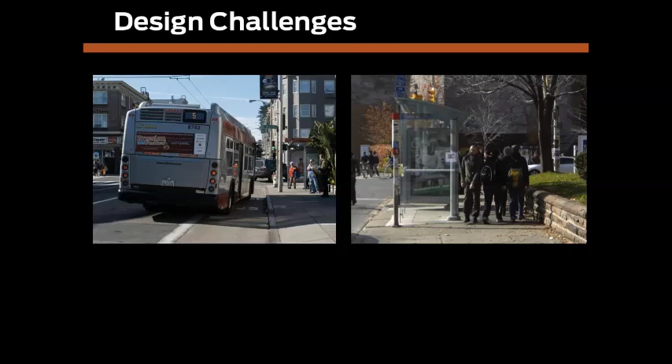Transit faces very specific design challenges, even in cities where there's already great transit service, even on streets where there's already a lot of on-street transit activity, and even when there's a lot of demand. We often face conditions where transit street design is an afterthought, even when there's frequent service already on a street, even when a lot of people are using it. So that's why street design matters.

So we're going to talk about why these principles have been developed and how they come into play in cities. The Transit Street Design Guide draws from best practice and cutting-edge research from across the continent and around the world to promulgate this new set of principles for designing streets that'll support efficient, safe, and comfortable transit service for everybody. It's really not just about making the bus run faster, making on-street rail run faster, but about getting people to transit and using transit as a tool for city building.

Better streets create better service. Investments in transit streets that organize and balance the users of a street can improve the streetscape and place transit in a priority position at any scale, from small neighborhood streets to significant capital reconstruction projects that place mass mobility front and center.

Transit creates urban places. We're in a singular time of urban population growth and regeneration, both in the United States and around the world. Almost half of Americans say they want to live in walkable urban places, and about half of those already know that what walkable urban places mean is a big city neighborhood. But only about 2% of the homes in the United States are in a walkable, transit-connected place. We can do much, much better than that.

In some cities, planners and engineers, service planners, transit providers are completely reconsidering the role of their transit system within the whole transportation suite of the city, considering how transit functions in relation to more on-demand services, in relation to bicycle networks, in relation to walking, and in relation to the growth of the city overall and over time.

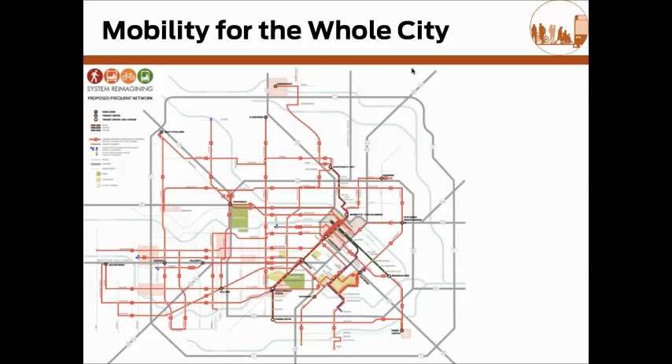This is the Houston new bus network. This is frequent service before the plan was executed in August 2015, and this is after. The remarkable thing is that they did this without spending significantly more money on service, and provided the city with not just service to downtown, not just reliable service that would get people in and out of the core of the city, where there's still a very significant amount of employment, but where a lot of growth has been pretty far outside of it and had been pretty disconnected from transit. So not only getting to downtown, but getting to the entire city and getting to the densest neighborhoods, some of which didn't have any frequent transit routes at all.

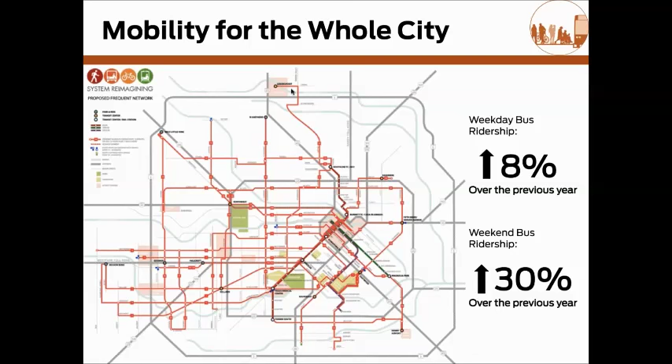The results speak for themselves. Weekday bus ridership is up, and weekend bus ridership is substantially up as people have come to rely on transit not just for a more conventional 9-to-5 work trip, but for a wide variety of the trips they want to take. As cities grow denser, there's just no way to grow while relying on the automobile.

There just isn't the space. We're not going to move everybody in cars who wants to be in a city, and they don't want to be moving in cars. And we certainly can't build the kinds of underground and above-ground capital investments that have traditionally been the trunk lines of transit systems in the United States to meet that massive growth. We certainly can't do it quickly enough.

But we can move people on the street in very large numbers if we take the leap to dedicate space to transit. It's far and away the most space-efficient travel mode, and therefore deserves the most investment on the street where people want to be. Whether users on the street are riding transit or not, everybody benefits from great transit, unlocking the street space and increasing connections to the rest of the city without pushing more and more cars onto the street.

One of the benefits that transit has for a city is to create the possibility of safe movement at a large scale. Transit has a 50-to-1 advantage over cars for vehicle occupant safety, and the safest cities are transit cities. A recent study observed reductions in injuries and fatalities after implementation of BRT projects of 25 to up to 70% on corridors. So transit safety is really all about people walking, and pedestrian safety is closely tied to the access and completeness of the networks.

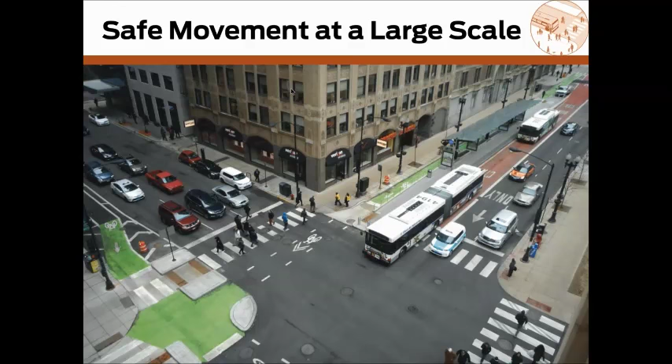What this guide does is add to that mix how you create great streets for transit that are also great streets to walk and bike on, as this example from Chicago shows. Finally, transit projects not only move people into a safer mode, but provide a chance to remake the entire street.

Cities are realizing the importance of planning growth around transit. The positive effects of transit investment on local business activity and regional competitiveness is well documented by now. But what's really important is to realize that it's not just the mode, it's the reliability and the permanence of the mode that matter.

And so cities are expanding far beyond the most tried and true methods that might be more popular with some or other groups of doing rail investment, of doing large-scale redevelopment, but really being able to use all the modes of transit as tactical ways and long-term ways of improving the local economic conditions and providing permanent economic benefits in neighborhoods and in large redevelopments alike. So as transit enables better access to communities, ridership really reinforces its own permanence and sets off that virtuous upward spiral.

Better ridership means more frequent service, and that means we need to put things where transit is so that people can actually use transit to get to those things, creating that simple yet vital upward growth in ridership. At every scale, at the neighborhood scale, the Transit Street Design Guide provides design packages that work on streets where the desire isn't for very fast movement, but for reliable movement.

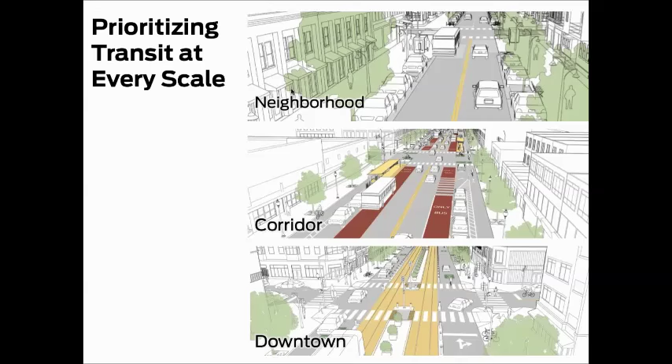For keeping buses in their lane and not forcing them to get stuck behind queued cars, to busy corridors that move very large numbers of people in transit and in every mode, providing an organized street that gives reliability, safety and comfort to every mode. To downtown settings where it's really all about public space and delivering people in large volumes as they get to their destinations. Downtown and destination streets can be linear public spaces, and that's critical to understanding the intention behind the guide.

The NACTO Transit Street Design Guide is the product of work by 45 cities, 18 transit agencies that participated in the steering committee, agencies that operate everything from bus to light rail to streetcar and everything in between. This steering committee, along with the contributing committee from ITE, the Institute of Transportation Engineers, and input from various federal agencies that work on both accessibility and on transit and on streets, ensure that the guide will be useful to both practitioners and the public, from the most technical users, signals engineers, to neighborhood leaders who really just want to make their own streets better.

I'd like to make a special call out to the NACTO staff who worked extremely hard on putting this guide together, certainly not just me, but also Craig Toocheck and Aaron Villere, as well as Corinne Kisner. Craig and Aaron's work on graphics, illustrations and production resulted in a gorgeous guide, and we couldn't have done it without Corinne's insight.

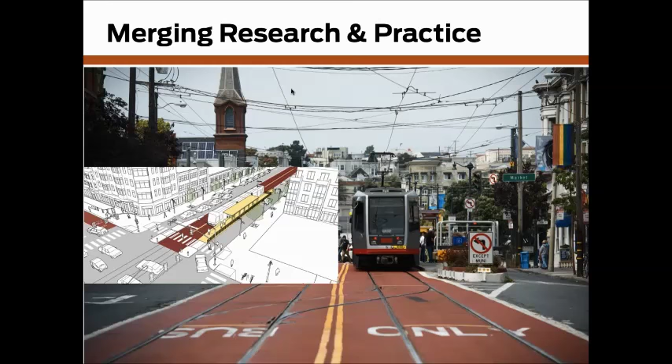One of the advantages of working at the level of city government is that cities are right on the forefront of practice, often far ahead of research. But research has come a very long way in transit, and we've got a great body of work to draw on, so we were able to construct full-scale models of streets. These are our street typologies, which form the core, the heart of the guide, together with more specific guidance recommendations, and built on and enhanced by detailed case studies that explain how these kinds of streets have been implemented in real life.

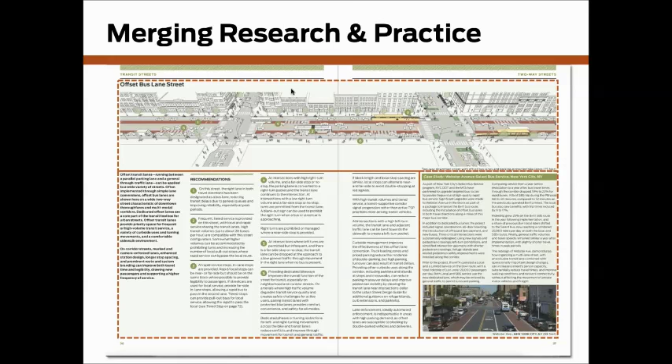So, the chapters of the guide: why transit streets matter, which we've talked about. What transit streets are—the typologies, stations and stops and elements, transit lanes and transitways—and then intersections and signals and systemic strategies.

The stations and stops section really explains how to go from stops to stations. That's a core principle for understanding how to create transit streets. Stations really create a sense of place, a sense of permanence, and they draw people to transit, draw people to a street, making them feel like it's part of their street.

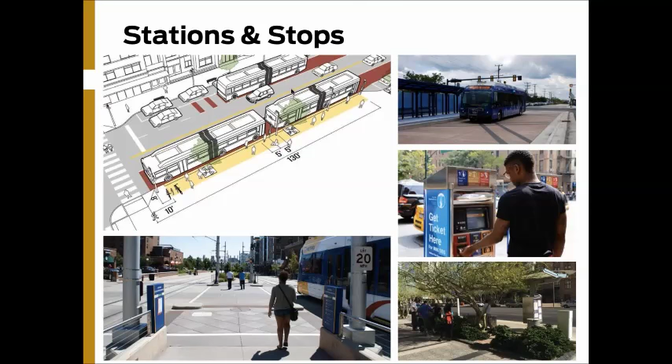And it's not always a matter of building large structures. Sometimes it can be as simple as providing shade trees that actually change the environment for people waiting for the bus. Sometimes it's as simple as explaining to people how to board a bus quickly, and providing ways to do that.

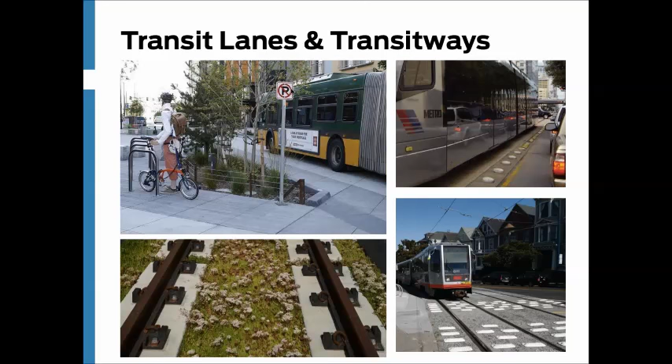There's detailed guidance on how to design transit lanes and transitways. We use transitways to mean any fully exclusive running way, whether for bus or for rail, and even guidance on the kinds of materials that have worked well, whether it's scored concrete or permeable green running ways, or simple means of separation that can keep everybody in the right lane on a street.

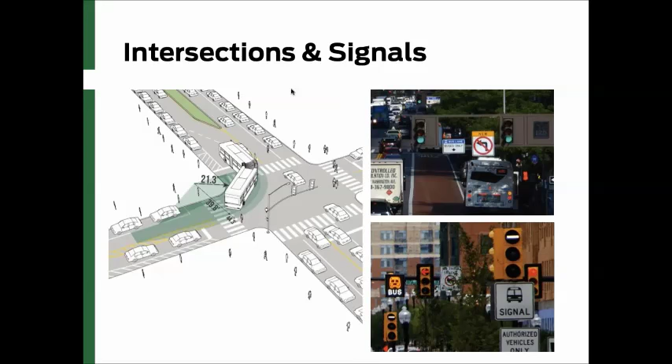Detailed guidance on intersection and signal design, helping everybody from engineers who haven't worked on transit before to general practitioners, to planners who may have worked on transit but not with a specific type of vehicle, understand what some of the technical requirements are for designing intersections around transit. And then all the way up to systemic strategies.

There's an example from San Francisco where universal all-door boarding, extending all-door boarding policies from what used to just be the rail system in Muni to all the Muni buses, reduced boarding time by 38% per person. When you save a second and a half per person across an entire city, you save minutes at every run. You can actually run more buses on a street, and that's what it's all about. If you create better service, you can create better streets.

So where does the rubber meet the road? It's really all about tackling sources of delay for transit. Here's an example from New York City, where on Webster Avenue, the BX41 in the Bronx carries about 35,000 people a day, and those folks were spending almost half of their trip not moving.

They're spending it stopped for other passengers. As you can see in that picture on the top, those queues get pretty long. They were spending it stopped at red lights. The signals weren't coordinated for transit, and then they spent the other half of their trip actually going somewhere.

So one of the interesting things is what that means is for those of us who don't work for transit agencies for a living, when you're a transit operator, you look at those numbers and you can say, wow, look at that - we're paying our operators and maintaining our buses, and half the cost of doing those things is actually spent not moving. So we have huge cost savings in addition to the savings of moving people.

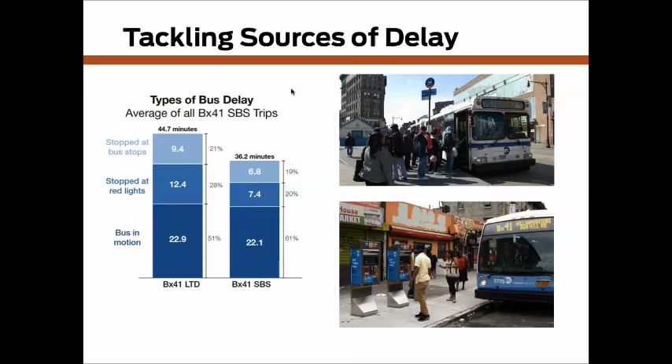So there's effectively a double win from reducing the amount of time that transit on streets spends waiting. Reducing that by converting from mixed traffic flow to dedicated flow, to dedicated bus lanes, transforms the way that bus lines work and the way that people perceive it.

Travel times are down, and as a result, ridership is up. As we saw in the previous slide, it's all about tackling those sources of delay. For cities and for neighborhoods, that increased throughput is vital for growth - this is how you get growth without increased congestion.

Faster boarding is assisted by in-lane stops, and you can put all these pieces together to create a fundamentally different kind of street.

Everything from the details of pedestrian refuge islands, which improve pedestrian safety and also save signal time, allow pedestrians to spend less time crossing the street, make it possible to have shorter light cycles. It's a detail that transit agencies almost never control, that street departments do control, and it's something where working together, street and transit agencies can create significantly better conditions, often through very small interventions.

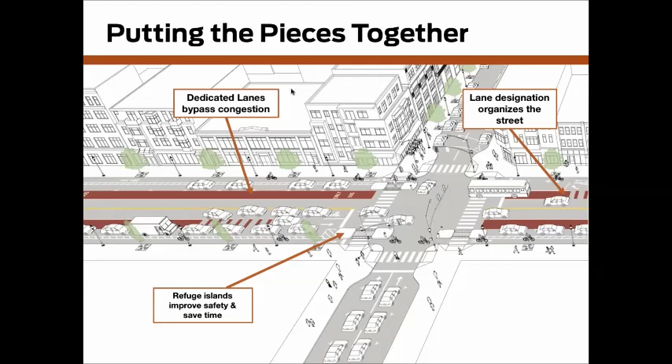Organizing the street by designating lanes, including providing protected bike lanes, makes it possible to create high-quality conditions directly along the same corridors as a bus line. Allowing right-side lanes, for example, allows local and rapid service to share the same lane. Center running lanes can do that too with right-side islands.

And there's a lot of creativity and ingenuity that transit agencies and street departments have applied to creating great streets. We're going to hear a little bit more about that from Bill in just a few minutes.

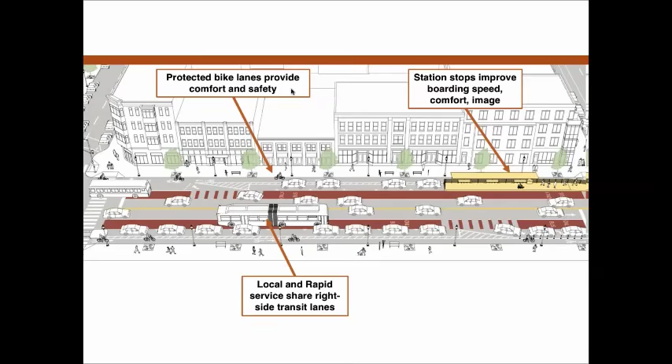Finally, the station improves the whole image of the street and creates a sense of permanence, creates a very comfortable place to wait, and elevates transit as an experience from the experience of kind of waiting by the side of the street and maybe something will come for you, into an experience more like what we associate conventionally with fixed rail trunk line systems. But what's good for rail is often very good for bus as well.

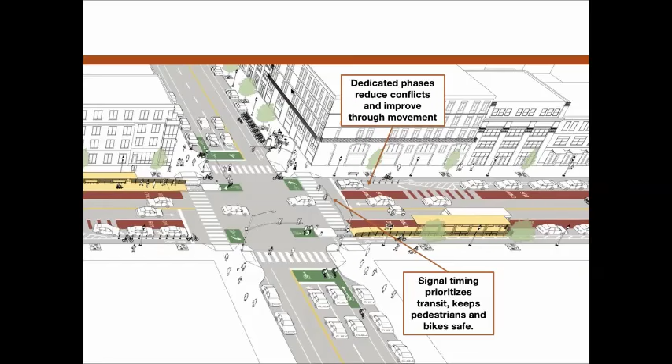Dedicating phases or managing signal timing in a way that works for transit, often lowering the speed at which signals expect traffic to go, can actually make buses go faster, somewhat counterintuitively.

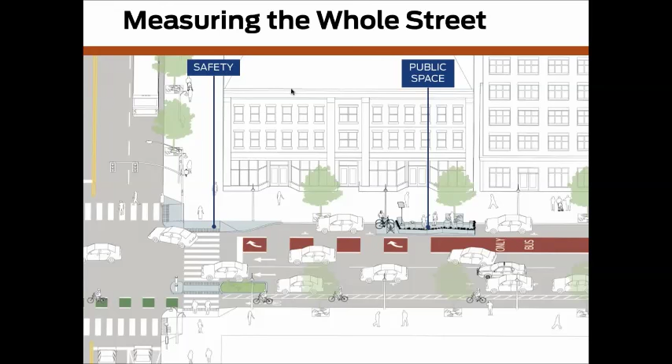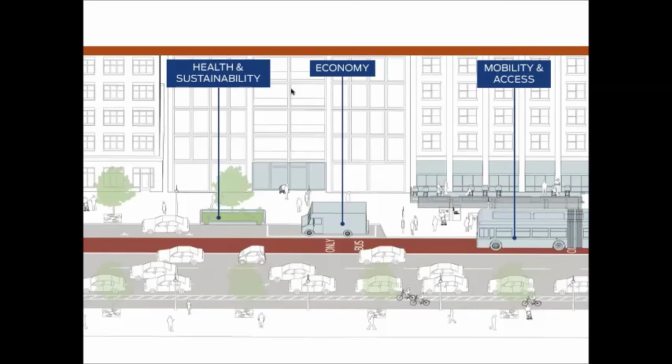Finally, it's all about measuring the whole street, from safety benefits to pedestrians to the public space benefits of dedicating space, to the economic benefits that flow from those things, and the overall health benefits from an improved walking, biking, active transportation environment. Transit is very much a form of active transportation, supporting those other modes and interplaying with them.

And finally, how do you create mobility and access for not a few hundred people an hour, but for a few thousand people an hour? That's really something that can only be accomplished when you measure it and when you work toward it. We get what we measure for, and you can't manage what you can't measure. So it's all about fundamentally rethinking how we assess our streets.

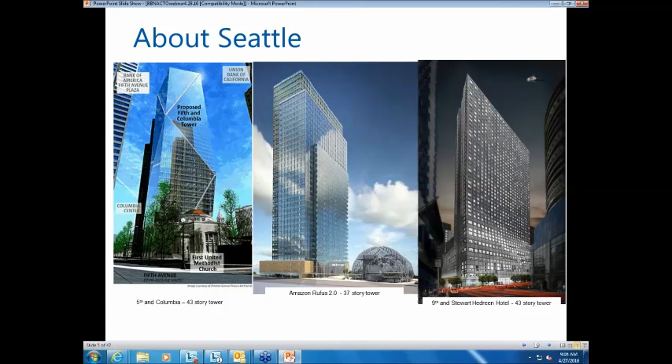Office buildings with parking for several hundred cars—700 is a figure that's common for some of the larger towers, the 40-story towers. And we as a city have essentially made a policy decision that growth needs to be accommodated through ways other than single-occupancy vehicles. So as Matthew said, there's just simply no more space, and improving transit and transit capacity and the attractiveness and effectiveness of transit is just absolutely essential in cities like Seattle.

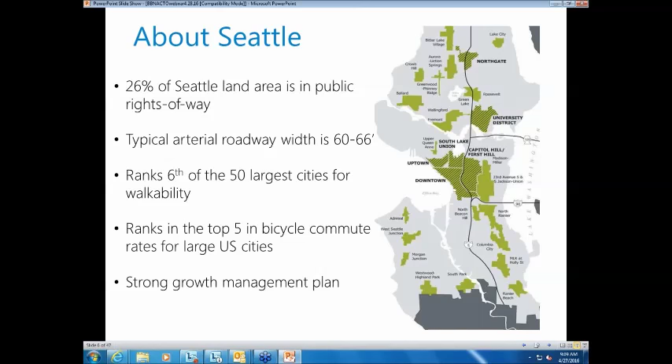Seattle is somewhat typical of large cities in that a huge percentage of our land area is in public rights-of-way, mostly street space. Our typical arterials are 60 to 66 feet. We do rank high in walkability and in bicycle commuting, and we have a strong growth management plan.

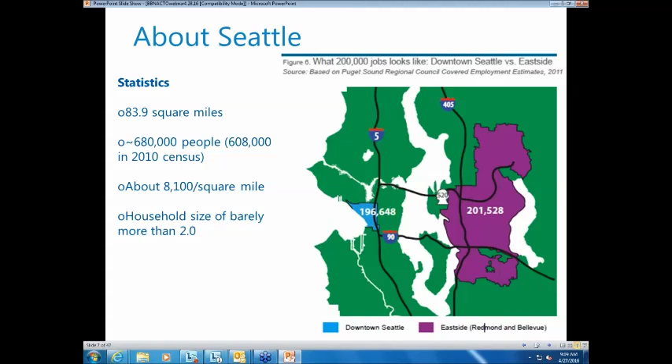As I mentioned, we're up to about 680,000 people. That's 8,100 per square mile, and we have a very small household size of just over 2. The map at the right shows in blue what we call the center city area of Seattle, with a population of nearly 200,000, or job base of nearly 200,000. And then on the right you see the eastern area of King County, including some fine dense cities, Bellevue and Redmond, but the space required to house that roughly 200,000 jobs is far more vast.

We have an excellent transit mode split in downtown Seattle of 45%. It's actually grown since then, and the drive-alone rate has come down from 31 to 29%. It's not so good once you get outside of the immediate center city, but we do have several other close-in employment centers with transit mode shares in the 30% range.

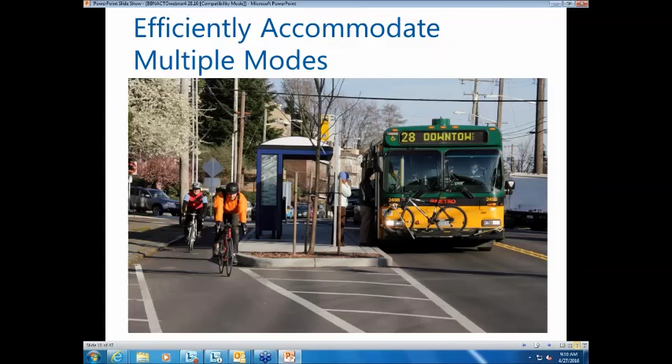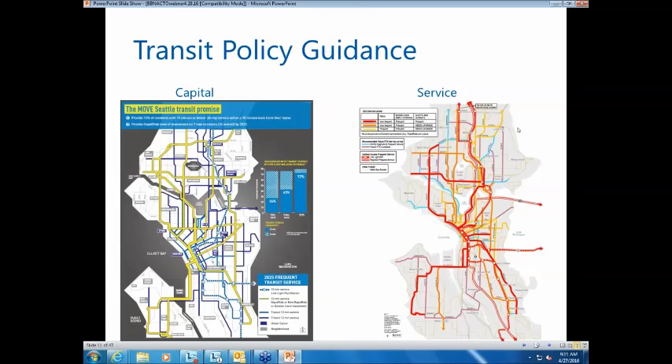We do have strong policy guidance on transit here in Seattle. We have a city transit master plan that was approved in 2012 and amended this year. It gives us both capital and service investment guidance for transit.

So the last thing a bus needs to do is wait for general purpose low occupancy traffic to pass before re-entering traffic at a bus stop. Islands and bulbs help organize the roadway and actually add to the public realm and to the space that is not dedicated to single occupancy vehicles.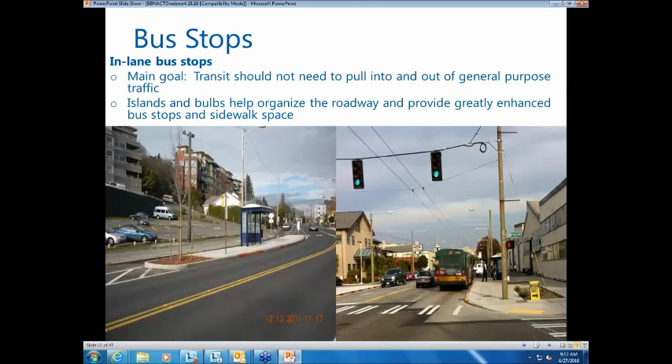This is a before and after of a project in the Belltown neighborhood of Seattle. Before, you can see that the roof of the transit shelter is just a couple feet from the curb line. In the after photo, we've added something like 6 or 7 feet of sidewalk width to this stop, creating an in-lane bus stop and a much more easily accessible pedestrian pathway for businesses and residents to the right of the transit facilities, the bus shelters, and generally upgraded the urban streetscape in this location while creating an in-lane stop and adding pretty dramatically to the quality of the transit passenger facilities.

This is another shot of a similar project. It's a little different project, but it's in the same area, the dense Belltown area of Seattle.

We always include amenities. Matthew mentioned the success that San Francisco has seen with off-board fare payment. In Seattle and King County, King County Metro has included in their RapidRide bus rapid transit program off-board fare payment at most stops. The City of Seattle and King County Metro have very strong partnerships across the board. We don't always agree, but we have had a great record of success in jointly implementing these projects.

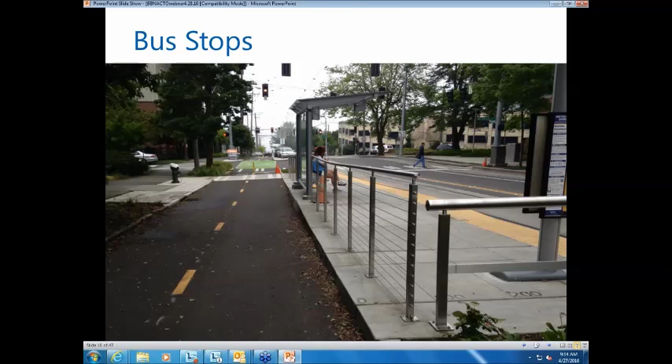Off-board fare payment I spoke about briefly, but we actually locally designed and had fabricated these transit information kiosks. They're really essential to keeping transit moving on 3rd Avenue, which is our main transit spine, with over 200 buses per hour per direction during the peak hours.

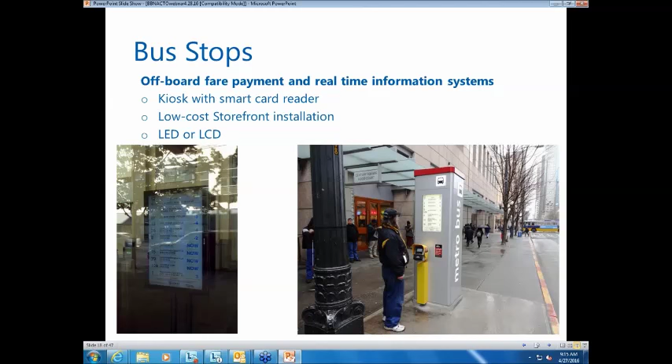So in Seattle, when we do bus stop projects, we tend to try to group those projects, and there's no better time to consolidate bus stops, to rationalize the distance between bus stops.

Our policy support is for approximately a quarter mile between bus stops. We have some other guidelines. For example, if there's just a single lane of travel, we're unlikely to build a far side in-lane bus stop at a signalized intersection. The signal is a proxy for significant amounts of cross traffic, and we don't want to block it. But it's very easy to do this when you have multiple travel lanes per direction. We've included guidance in our city right-of-way improvement manual that does require in-lane bus stops at most locations.

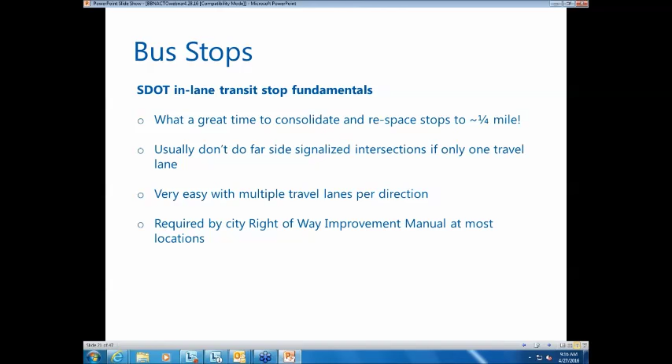And then there are bus lanes. There are many, many ways to do bus lanes. In Seattle, we tend to use what we call a business access and transit treatment, which is not an exclusive bus lane. It does allow vehicles to use the curb running or outside bat lane for turning onto and off of the street, but these vehicles are required to turn at intersections. Sometimes there's a parking lane adjacent to the bus lane.

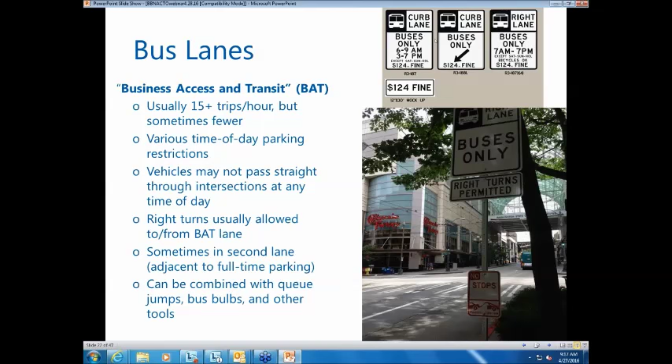As far as pulling all these pieces together, as Matthew mentioned, you combine bus lane treatments with other treatments, including signal treatments, queue jumps, transit signal priority, bus bulbs, bus islands, and other tools, and that's how you really get the effective package.

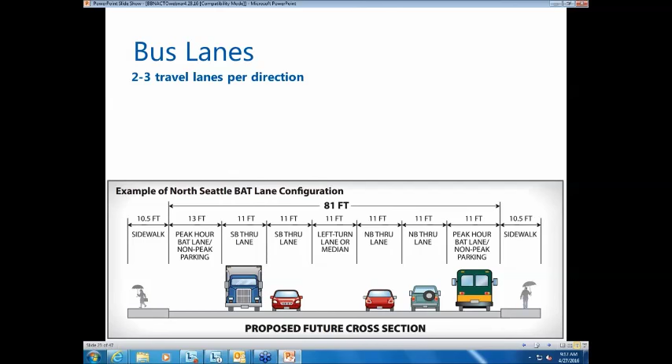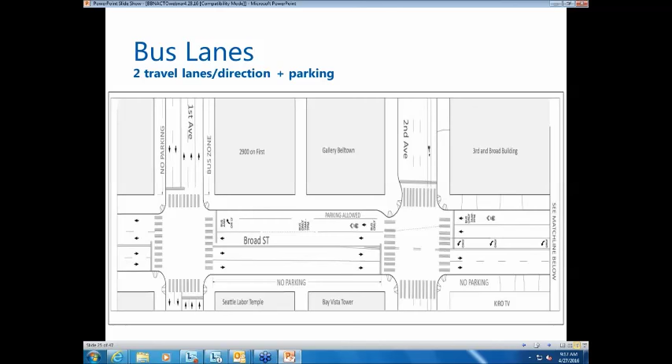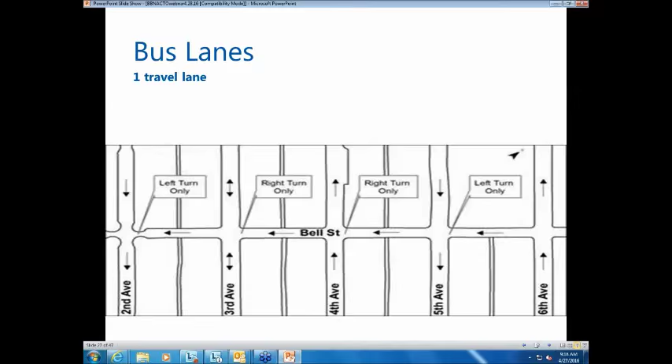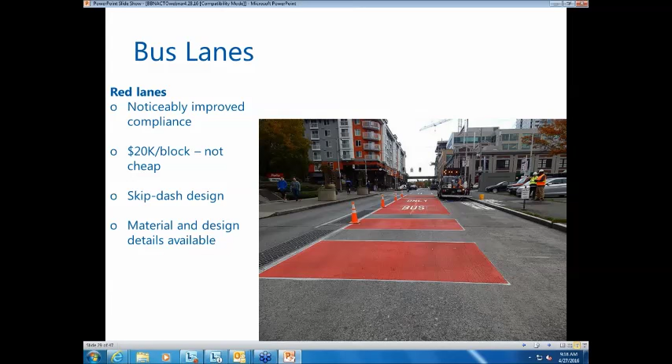I'm happy to provide details on any of this to any member cities or interested party. So I won't go into the specifics of the materials or design, but it's not cheap, though it has been highly effective, and it certainly raises the profile of transit in the public mind. There's just a picture of a Seattle crew installing a red bus lane.

This could be considered a form of transit signal priority. There's nothing other than traditional loop detection, so the signal doesn't know for sure that it's a bus, although there are ways to place the signal detection to give the signal a pretty good idea that it's a bus. But in a transit-only lane, this relatively low-tech solution has generally been very successful.

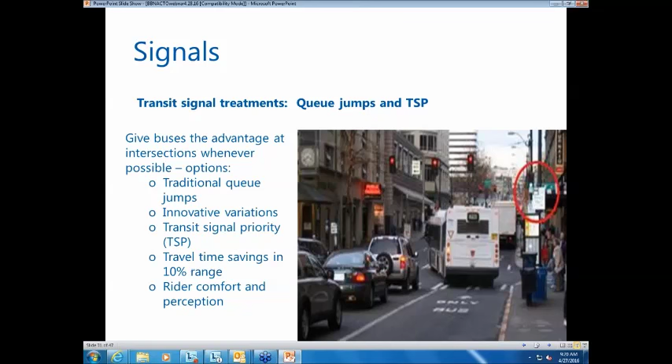When you apply these signal tools along the length of a corridor, you can easily achieve travel time savings in the 10% range, including signal priority, and up to 20%. It really varies widely by other factors such as overall traffic volumes, transit volumes, boarding activity, etc.

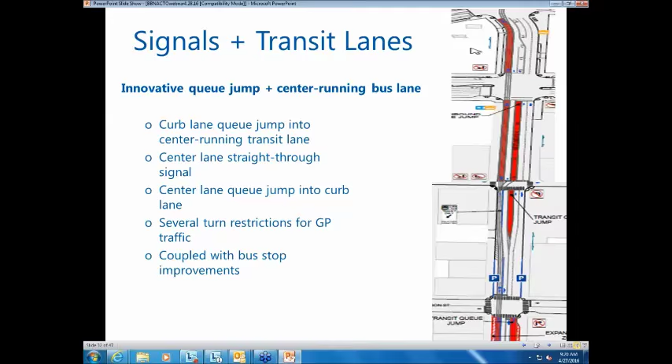Now I'm going to talk a little bit about this Westlake Transit Improvement Project, which includes some innovative treatments, such as a center running bus lane with, new for Seattle at least, signal treatments. This project was given the go-ahead in February of 2015 and was completely installed by March of 2016. The Westlake corridor, the overall project, is about a mile long. The Westlake portion of it is about 3/4 of a mile.

The project included extending several bus stops and shared bus and streetcar stops to accommodate more transit vehicles. There was a significant service increase scheduled for March, so our goal was to have the project completed by that time. The overall cost was $1.7 million for that entire length, including several bus stop upgrades, several signal upgrades, and restriping the entire corridor.

The lane widths did not change. The transit lanes generally range from 10 to 13 feet, with most in the 11 to 12 foot range, and the overall corridor width, curb to curb, is 58 feet for most of the corridor.